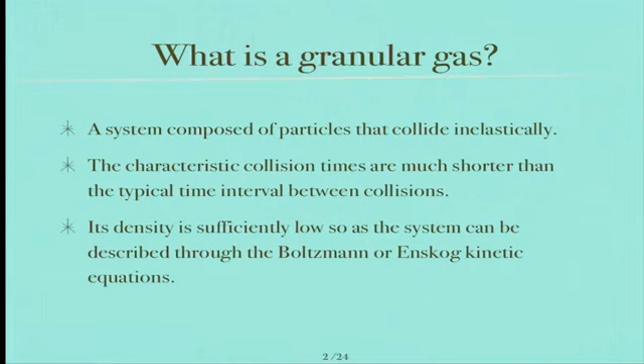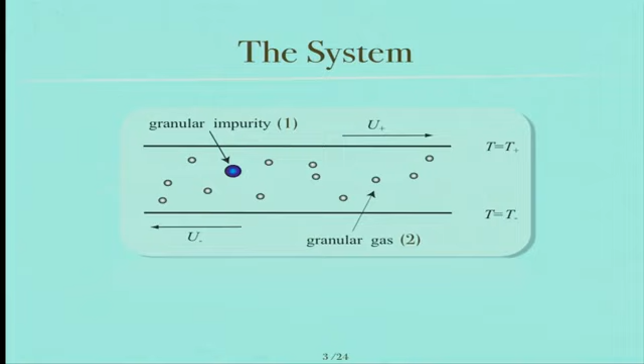So let me show you a schematic picture of the system. I have two different kinds of particles. One is in higher concentration than the other one. This one here, that is in a very low concentration, is what I call the granular impurity. And the other species, this one here, is what I call the granular gas.

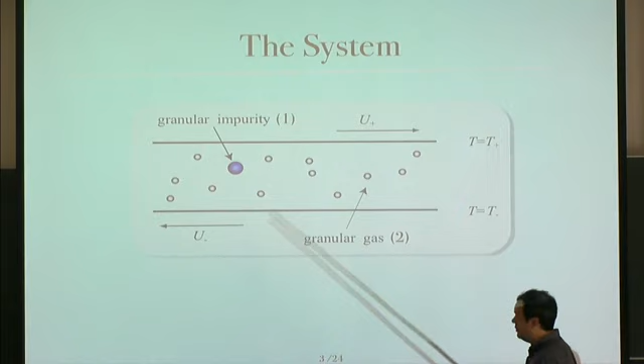The problem I'm interested in is determining, if I heat and shear the system from the boundaries, where the impurity is going to go, upwards or downwards. In this case, I neglect the effects of gravity because I am under the assumption that the energy input in the system is high enough, so I can neglect the effect of gravity.

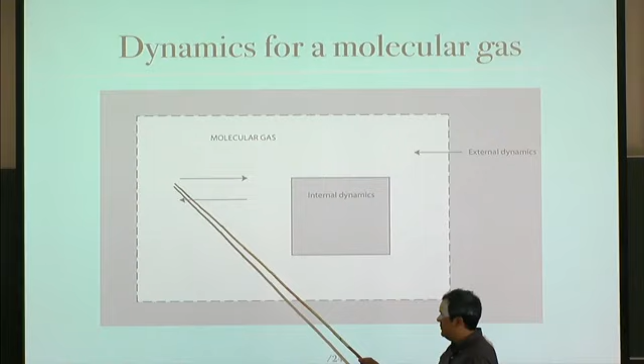So let me show you a schematic picture of the point of view from which I'm going to try to solve this problem. If this was a molecular gas, then the collisions are elastic, and there is transfer of energy back and forth between the particles of the system, and this would be the situation of the typical thermodynamic equilibrium state. But I can take the system out of the equilibrium state if I input energy from outside of the system into the system.

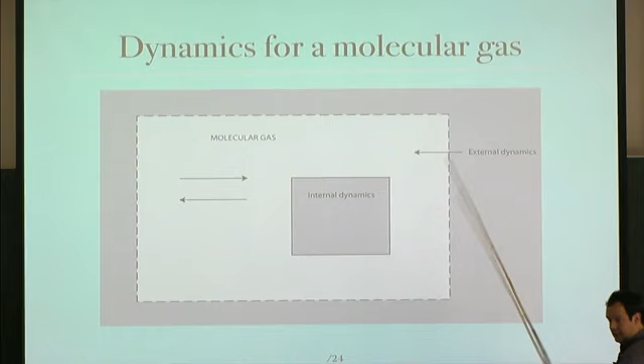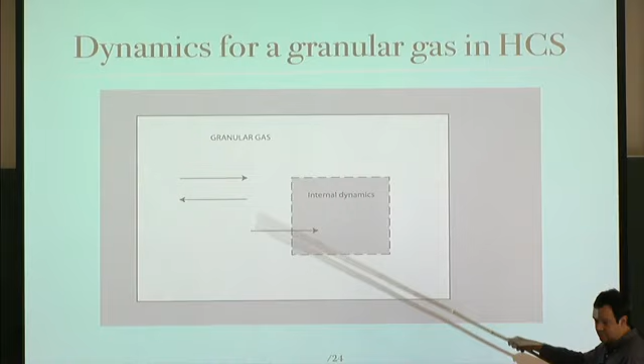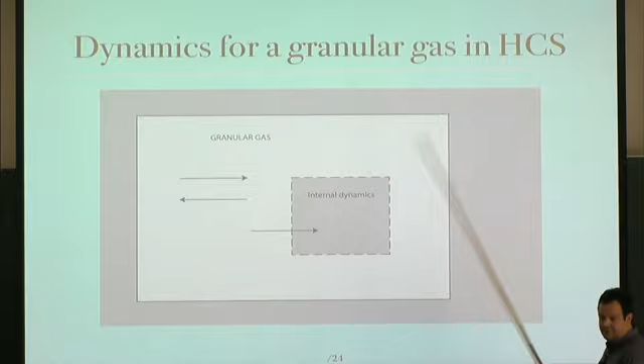But what happens in a granular gas? In a granular gas, again, I have transfer of energy back and forth between the particles of the system, but there is also a sink of energy continuously going into the internal dynamics of the particles that is never coming back. For this reason, if I don't input any energy in the system, the temperature of the system is continuously decaying, and that's the well-known homogeneous cooling state if the system is homogeneous.

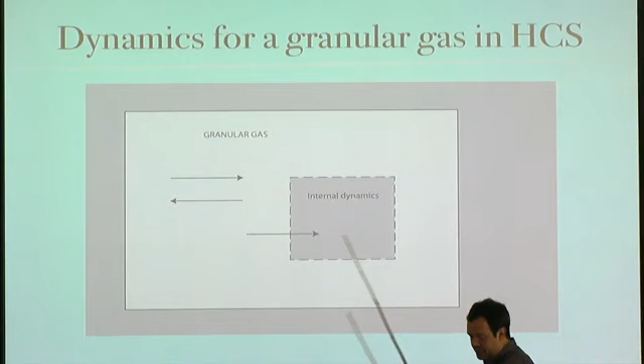Most kinetic theories are based on a development taking this as a reference state. But this state has an inconvenience, I think. One, it never happens in real experiments or real situations, and two, it's unstable. So the point of view here is, if a granular gas is anyway a thermalized system, why not consider as a reference state one that takes into account the external energy input that in any case is going to happen? So that's what I'm going to do.

And this also seems a natural choice because the energy sink is compensated locally here by an external energy input. So this global picture is more similar to this situation in the molecular gas than this. Okay, so that's the point of view from which I'm going to try to solve this problem.

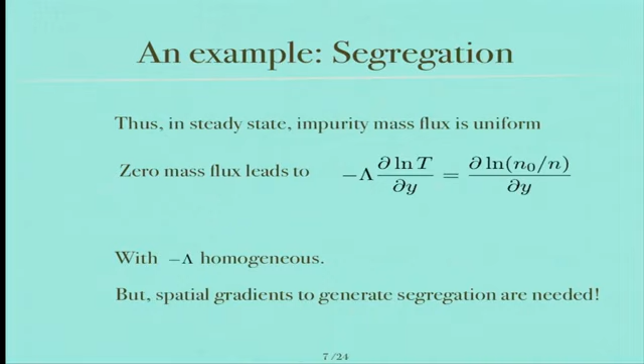So if I look for the segregation criterion from the mass flux for the impurity in a steady state, I get something like this, where this is a homogeneous parameter usually called the thermal diffusion coefficient, this is the logarithm of the granular temperature of the granular gas, and this is the logarithm of the relative density of the impurity compared to the density of the granular gas.

So this gives me a relation between these gradients, and depending on the sign of this coefficient, which is going to be homogeneous, I can determine if the impurity is going upwards or downwards. Obviously, this thermal diffusion coefficient depends on the diffusion coefficients of the granular impurity, and I need to resort to kinetic theory in order to calculate its value.

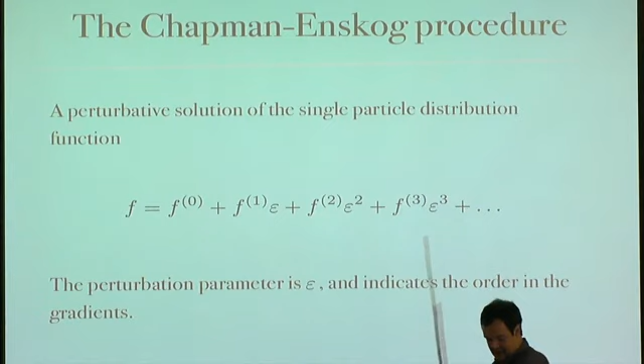Usually, this is done by resorting to the Chapman-Enskog method, which, as most of you probably know, is based on a perturbative solution of the distribution function for the single particle, where the perturbation parameter indicates the order in the spatial gradients of the hydrodynamic fields. If I neglect all terms but the zero order and first order terms, I have the so-called Navier-Stokes description. This is what I'm going to do.

This is why I think the picture of taking as the reference state the one that accounts for the external energy input, instead of the homogeneous cooling state, is useful, because this reference state is going to be closer in general to a steady state with imposed spatial gradients. So in general, this F1 is going to be actually small if I take this as a reference state instead of the homogeneous cooling state. And this is what I'm going to do.

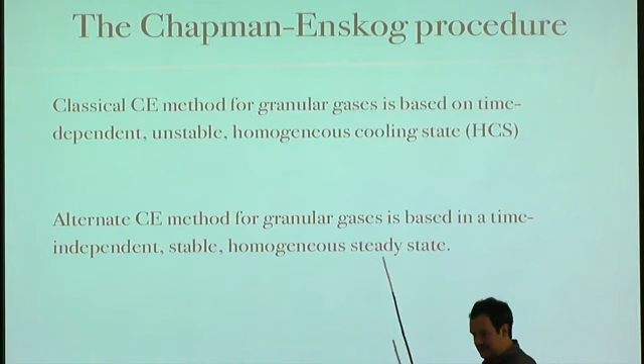And in this case, I expect this to work better than a picture based on the homogeneous cooling state, and to solve the problem of granular segregation. So let me show you.

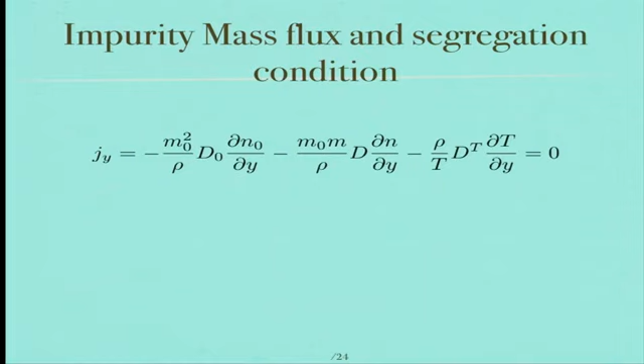This is the mass flux expression for the granular impurity, which depends on a series of transport coefficients. These are the diffusion coefficients related to these gradients here. This is the granular impurity density. This is the granular gas particle density, and this is the granular temperature gradient.

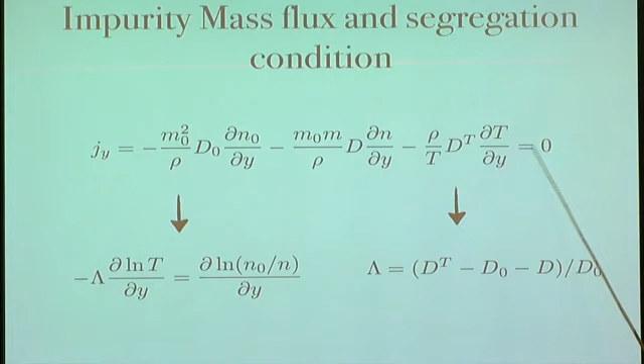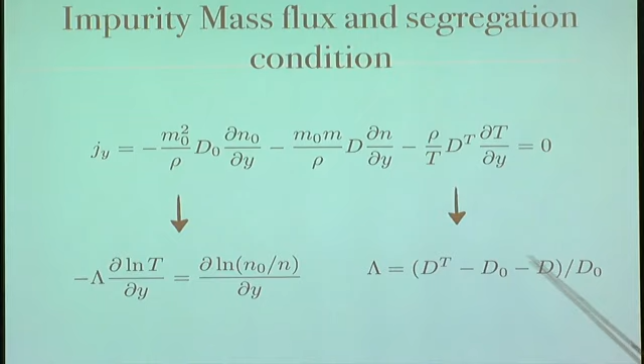So when I apply this condition for the state that this should be equal to 0, I get this condition here, where lambda, in this case the thermal diffusion coefficient, it's easy to show, is this. So the important thing when you are studying segregation is to determine if it goes upwards or downwards. So the critical point is when this changes sign, meaning when this is 0. This is what I'm going to look for in a steady state.

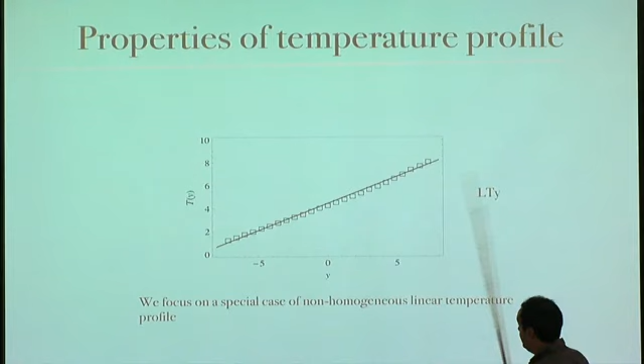So in this case, I'm going to use a steady state which has a linear temperature profile. This is a special state that can happen when there is a special balance between shearing and external energy input. This has been shown recently. I'm going to take this one. And this is a very far from equilibrium state for a granular gas.

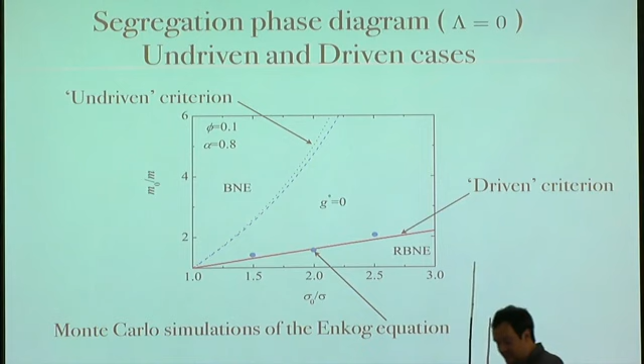And these are Monte Carlo simulations. So you can see clearly where the agreement is. So this is basically what I wanted to show you. Also to comment that since lambda results from the diffusion coefficients, it's typically known in segregation problems that for diffusion coefficients you need to resort to the second Sonine order approximation for the distribution function expansion. So I get a good agreement also for the diffusion coefficients: here is the first Sonine approximation, this is the second, and the symbols are Monte Carlo simulations of the kinetic equations.

This is for spheres and disks, for this value of the occupied volume fraction and the relative mass and relative size of the particles. And this is another plot of the diffusion coefficients. So you can see the first Sonine approximation is worse compared to the second one. So that's it. I wanted to be brief in my presentation.

So I'm presenting an alternate Navier-Stokes description derived from a reference state that should work better for non-homogeneous granular flows, which are actually what we are interested in for practical applications. We have verified this for the segregation criterion for an impurity in a moderately dense granular gas, and third, the second Sonine approximation is needed for accuracy with the simulations.

Yeah, but it's going to be closer to a real situation. But you have to know the energy input in order to calculate your coefficients. Yes, I know. So if the energy input is changing in your domain, then you have to know the energy. Well, the form of the energy input, that information is going to come from the boundary conditions, which you need too, because for example here in the segregation condition, let me see, you need to know the gradients to solve the problem, and you can solve the gradients once you have the boundary conditions. See, but this is local.

If you have boundaries that are quite distant apart, then you would have to solve an additional differential equation for the energy input, right? No. You just have the differential equations in the volume and the boundary conditions. Okay. So it's all you need to solve the problem. And depending on how you input the energy at the boundaries, you have one solution or the other for the volume profile.

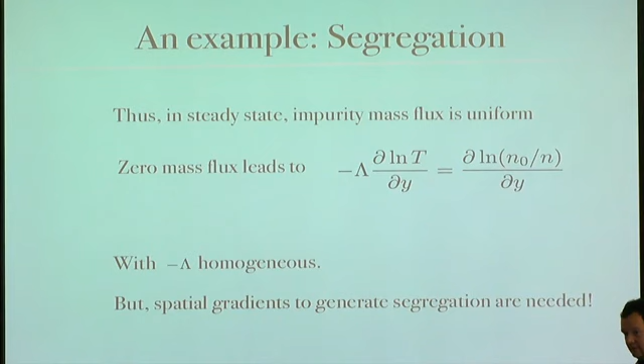I had kind of a related question. I was curious to know, your constant, is it constant or does it go as T? My constant? Which constant? The one that goes capital C. The energy. Well, in the reference state, it is constant because the system is homogeneous here.

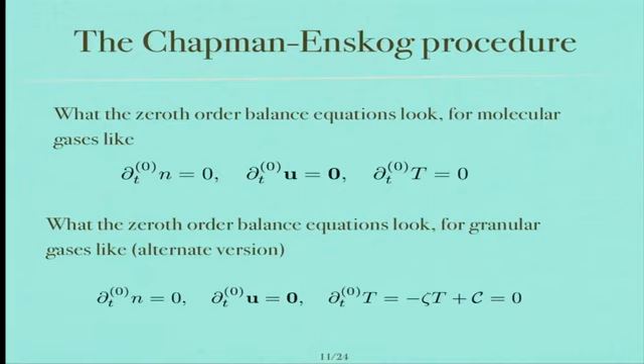Yeah, that one. If the system is going to be homogeneous, it is going to be constant. But if it's not, for the first order term, this is going to follow the profile of this, so it can compensate locally and balance. But as for the reference state, yes, it is constant.